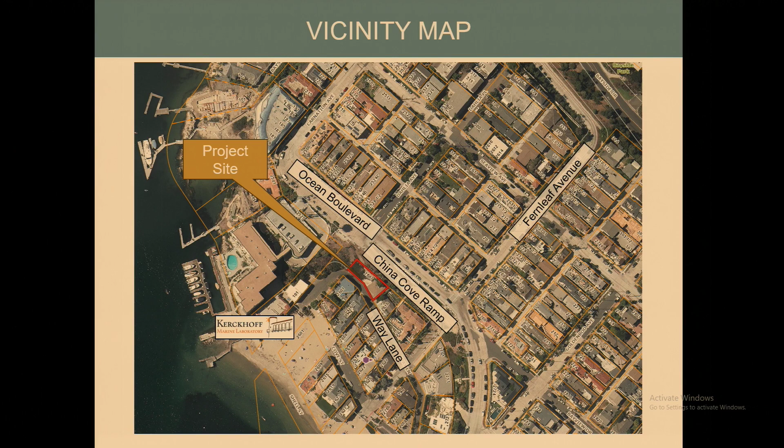The project site, 2607 Ocean Boulevard, is located within Corona del Mar. Surrounding land uses are almost exclusively residential, with the exception of the Marine Lab right there on the water. I've highlighted some of the streets in the nearby area that I'll be referring to throughout my presentation: Ocean Boulevard, the China Cove Ramp, Way Lane, and Fernleaf Avenue.

The project location is within an area known as China Cove, which was developed for residential uses approximately 80 years ago. The project site is outlined in yellow, and while the shape looks like a rectangle, the lot is actually irregularly shaped—somewhat like a bow tie. It's located on a remnant bluff with an extreme slope from Ocean Boulevard down to Way Lane, sloping approximately 35 feet.

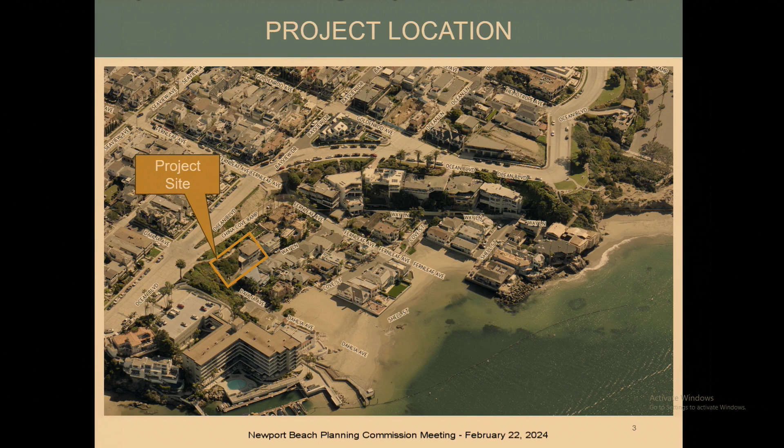Also adjacent to the property is what looks like a green strip of landscaping—that's an area known as the Ocean Boulevard Public Right-of-Way. There are 8 other properties that share this extreme slope between Ocean Boulevard and Way Lane. I'd also like to highlight that there is an undeveloped city property immediately west of the project site, and an undeveloped area on the Marine Lab property.

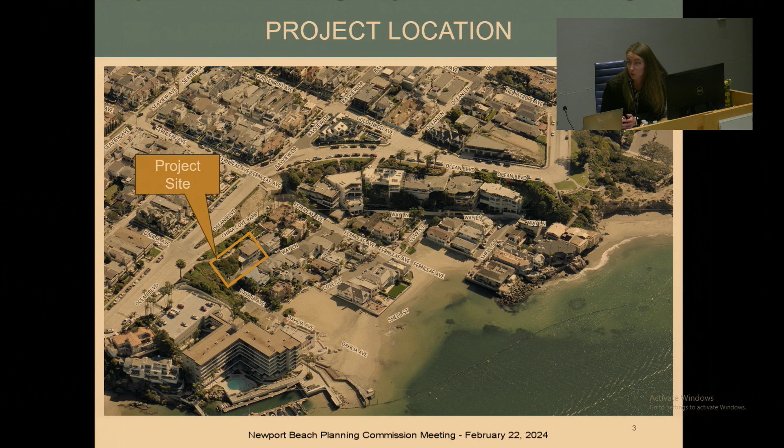The existing site was developed in the late 1940s. There is a 3-story single-family residence. The existing development is non-conforming as it exceeds the height limit along the southern edge, and it also encroaches into the required front, rear, and easterly side setbacks. While there is a garage visible in this photo, the garage is undersized and the residence provides no code-compliant parking. Above the retaining wall, that is the undeveloped area of the property, landscaped with natural vegetation.

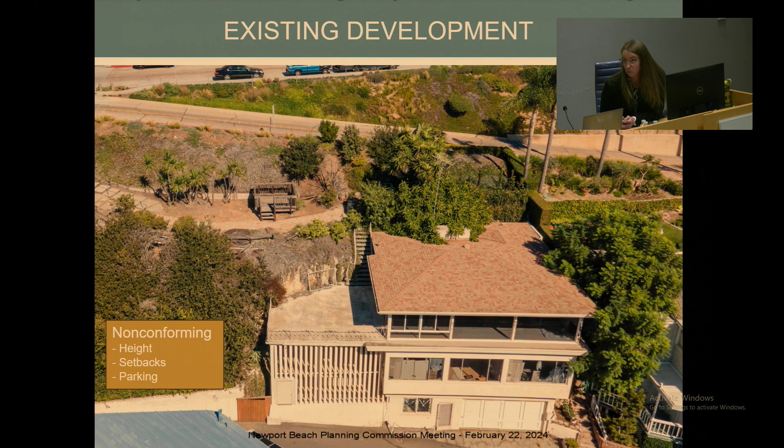Within the public right-of-way I mentioned earlier, there are unpermitted encroachments beyond the property line, including a staircase providing access from Ocean Boulevard to the existing residence, as well as an observation deck along with large landscaping. Within the public right-of-way at Way Lane, the building actually encroaches beyond the property line, highlighted there in red. Also, while not an encroachment, I'd like to point out that the building has recently been vandalized and has been boarded up, sitting like this for a little while now—I'll speak to that on my next slide.

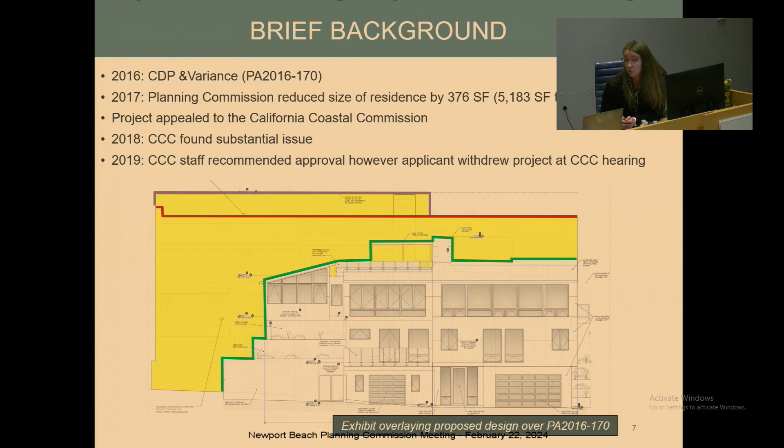About 8 years ago, there was a proposal to redevelop this site. The previous owner applied for a CDP and variance. The design proposed 8 years ago is shown in yellow, with the roof line shown in red. It was a 4-story building with a privacy screen above the roof line shown in purple. The Planning Commission approved this project in 2017, and it was subsequently appealed to the California Coastal Commission. Coastal Commission staff recommended approval, however the application was withdrawn at hearing due to concerns about potential impacts to views.

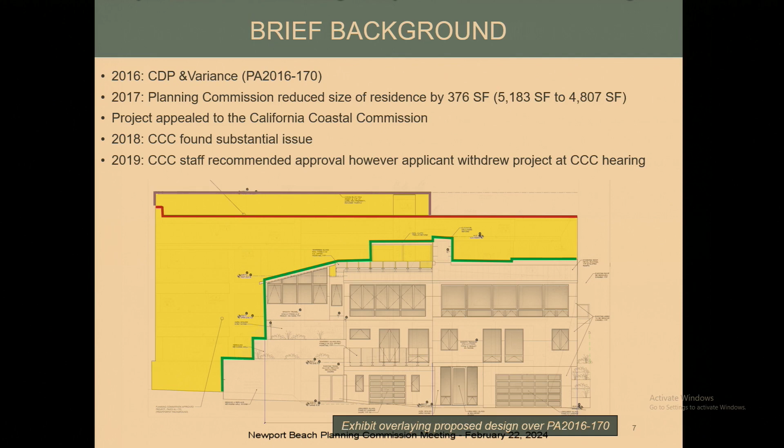I'd like to highlight the current proposal, outlined in green—it's significantly smaller than the proposal from 8 years ago by approximately 1,000 square feet. So that takes me into the current proposed project. It will add 1,490 square feet for a residence just shy of 4,000 square feet, with area added to the lower level, the middle level, and the upper level.

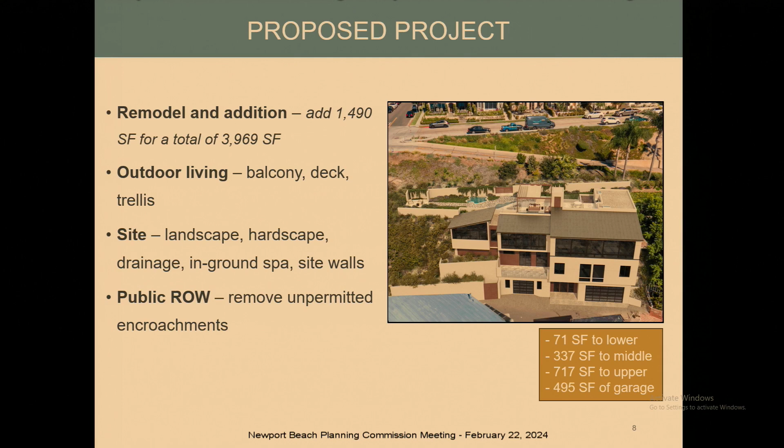The project will create code-compliant parking as well as provide an additional space. There are improvements proposed on the exterior of the structure, including landscape, hardscape, an in-ground spa, and as part of the project, the encroachments within both the Ocean Boulevard right-of-way and the Way Lane right-of-way will be removed. As seen in the picture on the right, a portion of the site will be left undeveloped and in its natural state.

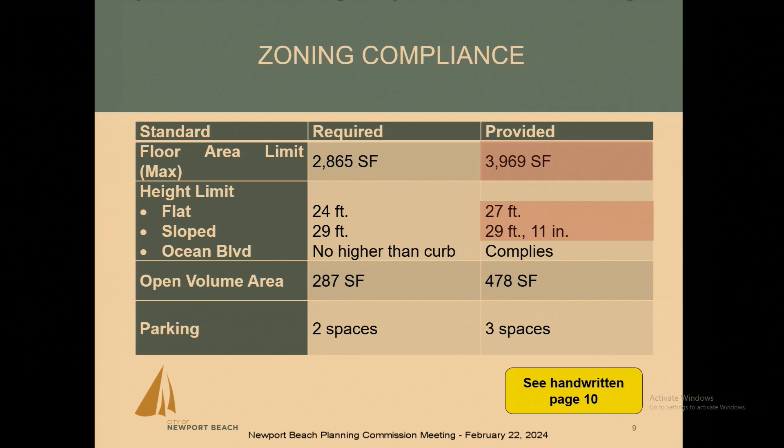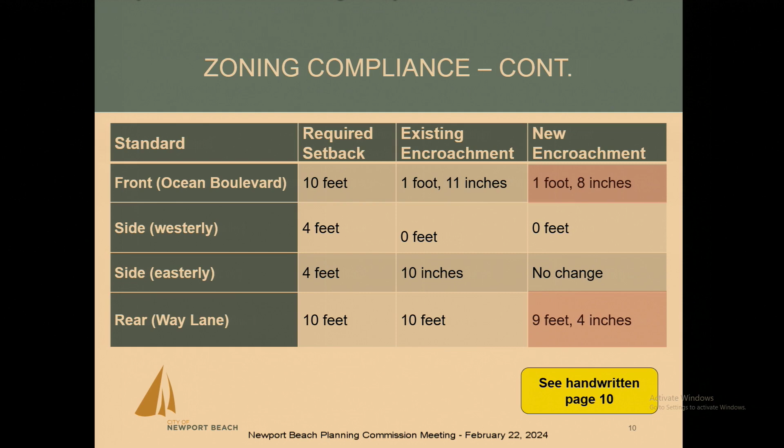Now, with regards to the setbacks, as I mentioned, the building currently encroaches into both the front, rear, and easterly side setback. The proposed project will introduce new building mass within the front and rear setback, in the amount of 1 foot 8 inches for the front setback, and 9 feet 4 inches for the rear Way Lane setback. However, it does not introduce any new building mass into the easterly side setback.

The project requires discretionary approvals in order to implement. It requires a coastal development permit, and for those reasons I mentioned prior, for the floor area, the height, and the setback encroachments, it requires a variance from both Title 20 and Title 21 standards.

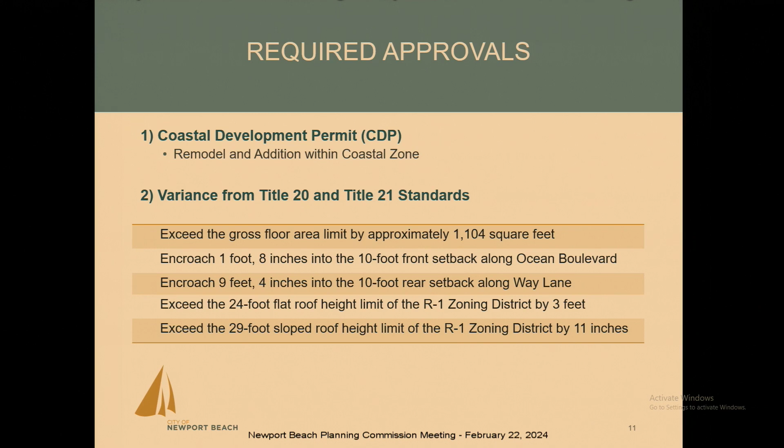In order to recommend approval of the project, staff is required to make a certain set of findings for the variance and for the coastal development permit. In order to recommend approval of a variance, there has to be some special or unique characteristic of the lot that's depriving the property owner of enjoyment of their lot, and it can't be a special privilege or detrimental to the surrounding properties. Similarly, in Title 21, our local coastal implementation program, there are the same findings, but there are additional findings with regards to impacts to coastal access and views.

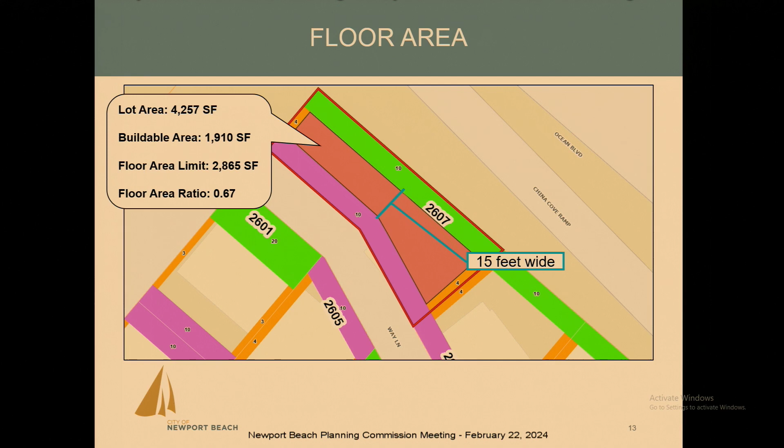This image here dives into the first request for a variance for the floor area. As shown in green and purple, those are the code required front and rear setbacks. It eats up a large portion of the lot. This is a really wide and shallow lot, and it results in a really narrow buildable area. In the most constrained point, the buildable area is only 15 feet wide. So this lot has a floor area ratio of 0.67.

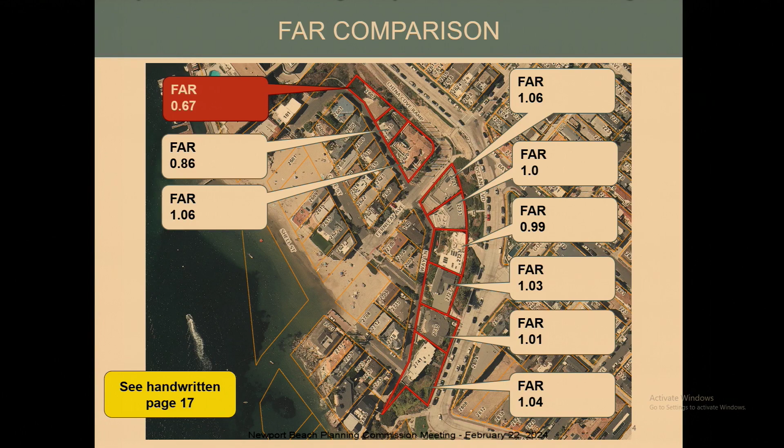Comparing this property to the other 8 properties between Ocean Boulevard and Way Lane that have that really similar extreme slope, all of the other properties have higher floor area ratios. Bringing the analysis to the properties that abut Way Lane, as you can see, these properties encroach into the required setbacks on Way Lane, so these properties likely already exceed the floor area limit as well.

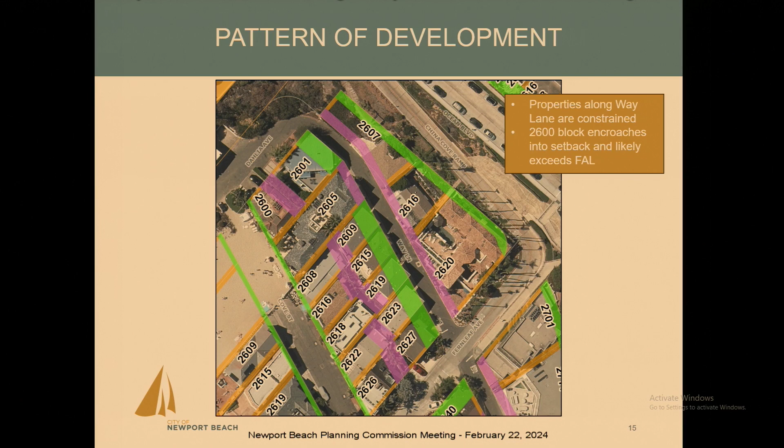A little bit about Way Lane. Way Lane was historically an alley. It's 20 feet wide, and so if it was still designated as an alley, it would have a 0-foot setback. As you can see, the majority of the development along Way Lane goes up right to the property line because it was an alley at one time. So this proposed project follows the existing pattern of development.

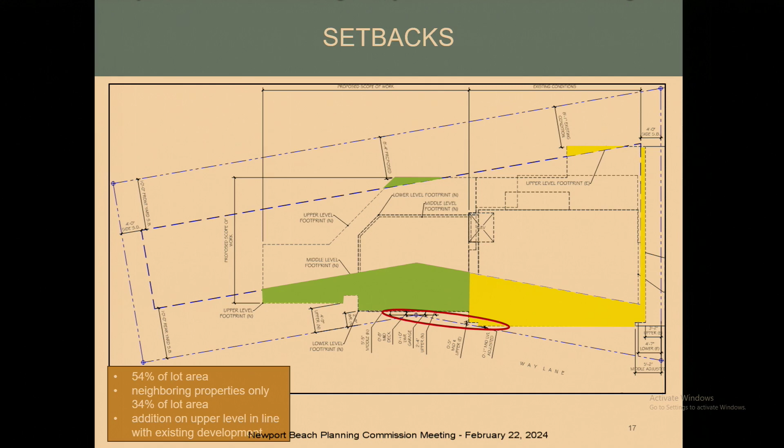As I mentioned earlier, setbacks eat up over half of this lot, where the surrounding properties' setbacks only take up approximately 34% of those lots.

And I also want to note that both of these exceedances still comply with that top of Ocean Boulevard curb limit.

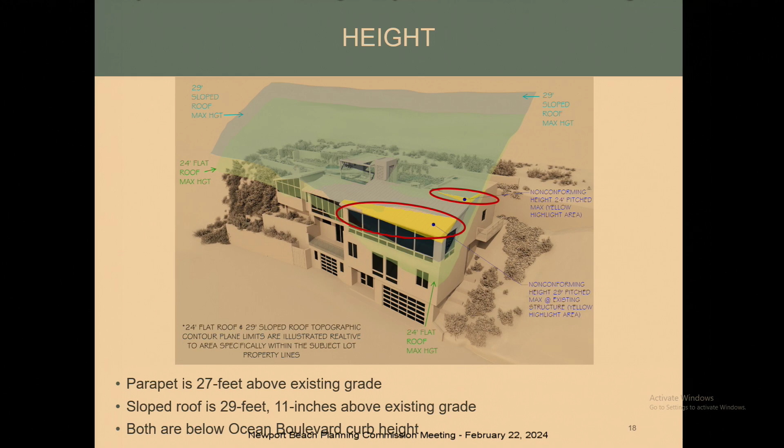Next, a discussion of public views. Our code requires us to protect public views, so I've highlighted the nearest designated public viewing points.

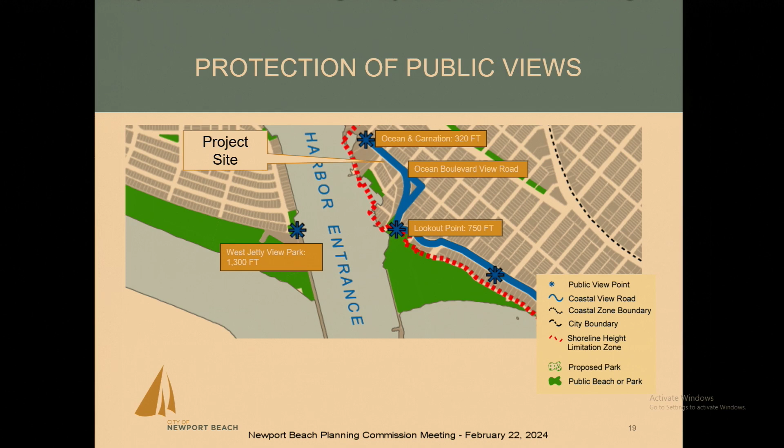The views from Ocean and Carnation and Lookout Point are not analyzed in this project, as the project is blocked by the existing development. However, views from West Jetty View Park are included, and Ocean Boulevard.

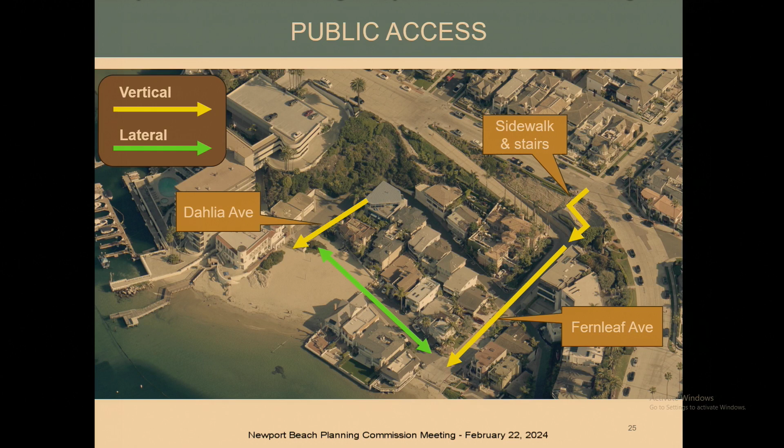This slide shows public access within proximity to the site. The public can access the coast through stairs from Ocean Boulevard down to Fernleaf Avenue. This project does not include any features that would obstruct access along these routes.

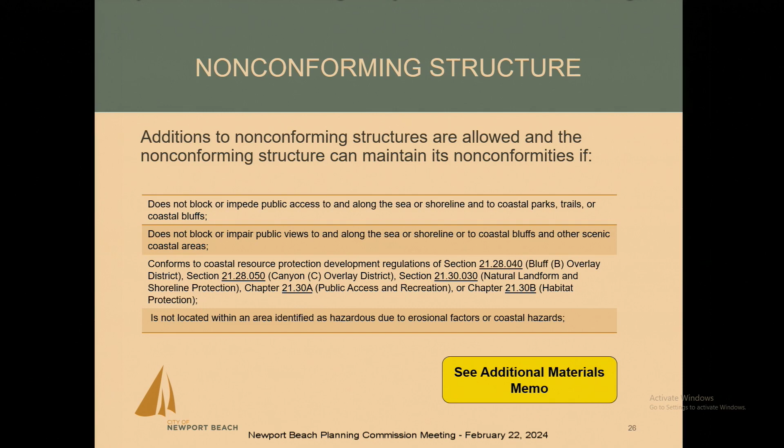Like I mentioned earlier, the existing structure is non-conforming for a variety of reasons. Title 21 has quite a few considerations that need to be made in order for an addition to be allowed. Staff analyzed the project against these considerations and found that the project complies and the addition is allowed.

Staff has received written comments regarding the project, one letter of support and multiple letters of opposition. In response to some of the written comments received, staff has revised the resolution to include additional facts, and that revised resolution was made available as additional materials earlier today.

I'd also like to mention that in the construction management plan, there is a reference to construction occurring on Saturdays. However, this is an area where you can't do construction on Saturdays, so that'll be fixed prior to building permit issuance. So staff has been able to make the findings to recommend approval of the project.

So next steps would be to conduct a public hearing, find the project exempt from CEQA, and adopt the resolution approving the project. That concludes my presentation. I'm available for questions. The architect is also here and has a brief presentation.

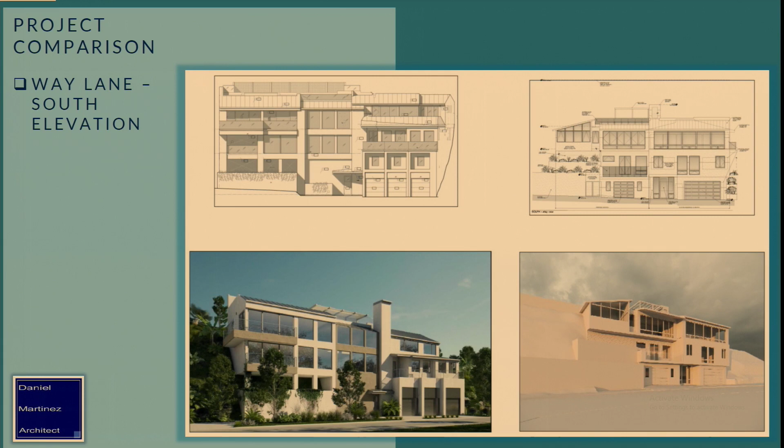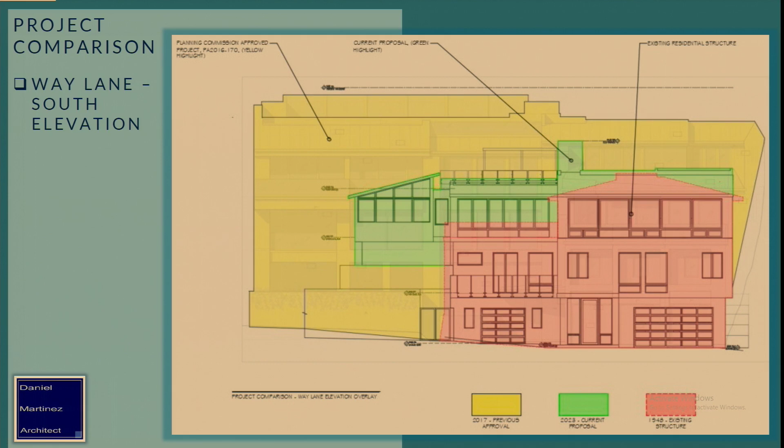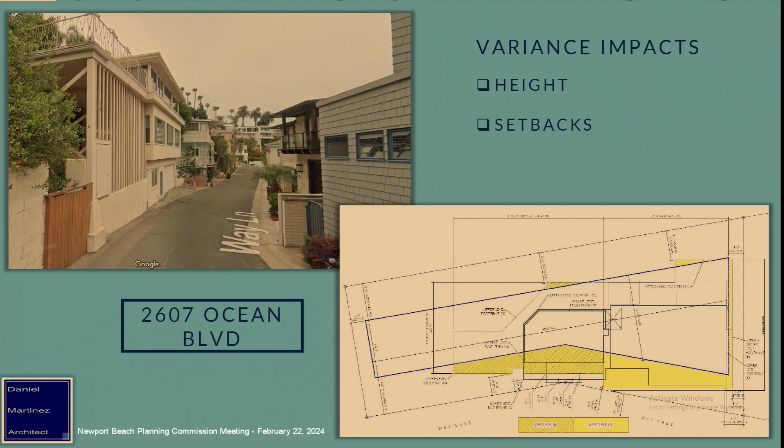So I'm only going to briefly touch on the variances. I think the staff report really drills down on why the justifications exist. Again, we're showing here the same patterning that Jocelyn showed in her slide, and this kind of bow-tie effect that the existing property presents to us. One of the complications in the justification for an FAR variance is primarily because in order for us to fulfill the percentages that an FAR provides, we would have to fit that in essentially the width of a car space, and that just doesn't work for a residential construction of any sort. So the remedy, of course, is the variance application, and I think the justifications have been put forward nicely by staff.

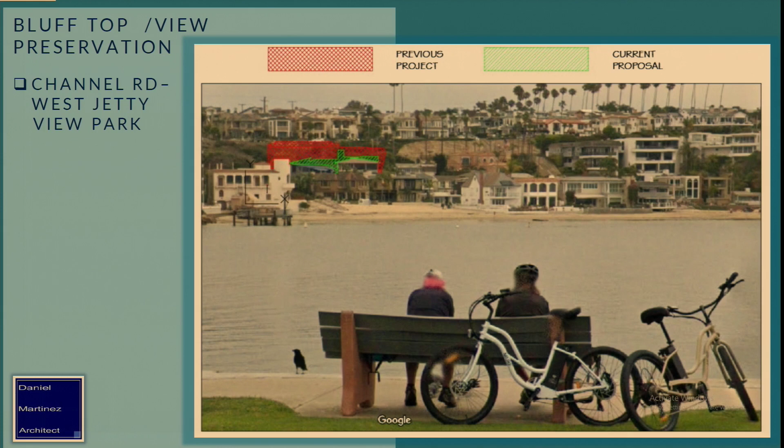And as you can see, it's about 84% larger than the proposal that we are bringing here tonight. And to see that in context, this is an important slide, primarily because the standard for which the Coastal Commission will review bluff view and the preservation of bluff has to do with the built environment that already exists.

So if you look, it's not a super clear slide, but if you look from just about center of the slide, you see the roof line in kind of a Spanish revival style home, which is two doors down. And if you follow that roof line across to the house just to the east, sandwiched between our project and the Spanish revival style house, and then moving across our property, you'll see that there is a common prevalent design pattern there that we are honoring.

And the other important thing here, of course, is now you can see in this slide the amount of bluff top view and preservation that we are providing here, even to the extent that you can still see, not so much in the clarity in this slide, but you can still see the entire length of the curb line of Fern Leaf Ramp as it starts from Ocean Boulevard and goes all the way down until it reaches the Spanish Revival type of home. So you're getting not just the bluff from Ocean Boulevard to the ramp, but you're getting a portion of the ramp to the construction that we're proposing.

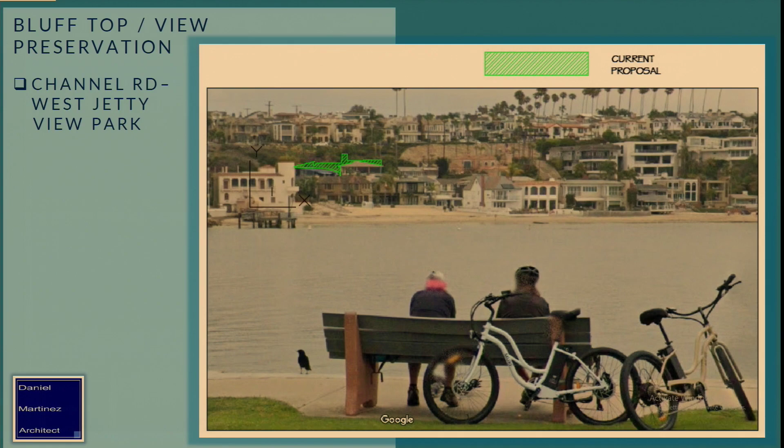And we're trying to mitigate the variance requirement for the encroachment into the rear yard setback, I guess it is, since it's an Ocean Boulevard address. And then we continue to do that all the way up the building.

So when you get to the next level up, we're pulling back another 7 feet. And the next level up, we're pulling back 4 feet from the existing facade. We kind of periscope back into the lot.

Everything from that point, in terms of elevation, our highest point, as Justin's brought out, we cannot exceed the height of the curb at Ocean Boulevard. But the highest point of the building, the elevator shaft that extends in the center, is 10 foot 9 inches below that mark. The remainder of the property is between 16 and 17 feet below that, which is why, as you saw in that other slide, we can afford the views down to China Cove Beach.

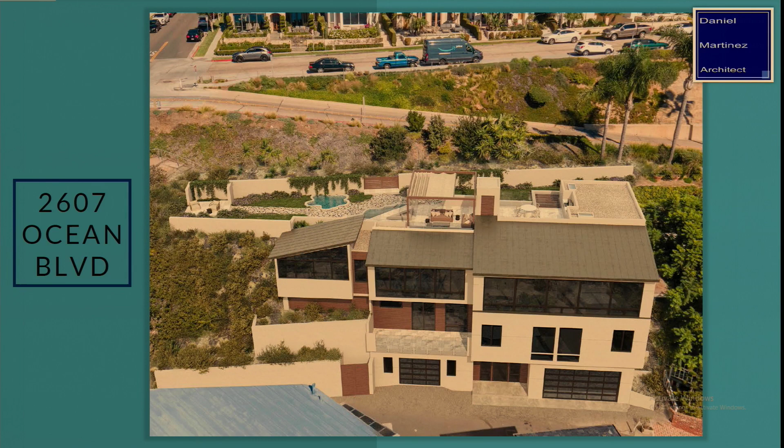That seemed like a prudent way to approach it, given the comments of the Coastal Commission on the last project. And the last thing, all the new construction outside of the footprint of the building, as we go into this addition from right to left, all of the heights for those roofs are completely conforming to the requirements of the zone. With that, thank you for your consideration, and I'm available for any questions you might have.

Just real quick, we'll probably have a couple of comments for you, but first off, have you read and do you approve or agree with the conditions of approval? The conditions of approval in regard to the staff report and their conditions that are assigned?

So if I'm understanding specifically, we have the conditions of approval that were in regard to the public right-of-way off of the ramp. Myself and my client have talked about this at length. One of the things we've worked on with Public Works and Parks Department is the removal of the dirt walkway, and a rehabilitation of that slope at our cost, where indigenous and drought-tolerant plants will be placed there. They would be irrigated for a period of time where they would take hold, and then the irrigation systems would be removed.

Okay, great, so that's a yes. An absolute yes, sorry. Perfect, that was a long way of saying yes. Thank you. Any commissioners have any questions for the applicant?

Just real quick, just for clarification, you're not taking any access off of Ocean Boulevard or that little area? None whatsoever, from Way Lane. In fact, when we began our preliminary design, it was about the time the city was doing the renovation adding the sidewalk at Ocean Boulevard and the benches. At that period of time, if you've been to the property you know what I'm talking about, at that portion of the benches they incorporated a cable rail system, a guardrail, where the access that previously existed was completely blocked off unless you're climbing over the rails.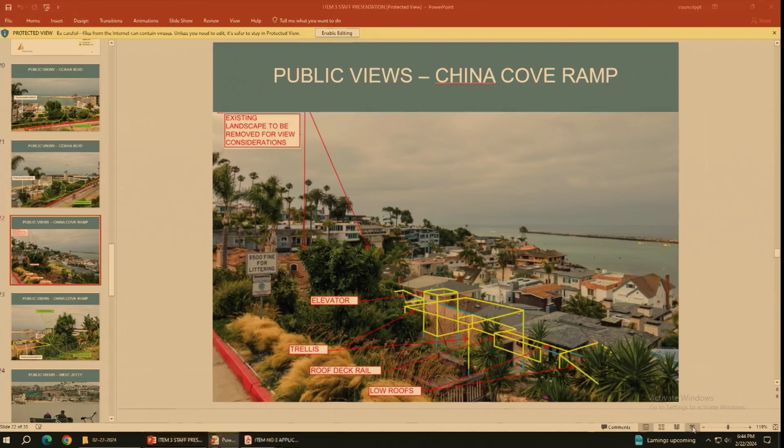Might as well stay there for a second. Commissioner Langford? Yes, Mr. Martinez. If you wouldn't mind pulling back up that view from the ramp, if you still have that. I'm going back to the palm trees because I'm curious how it's going to lay out in this new view, especially from the ramp side, because I saw there were a couple of other palm trees in the frame of existing landscaping. So are these proposed palm trees of that same kind of look, and can we expect it to grow to about that same size?

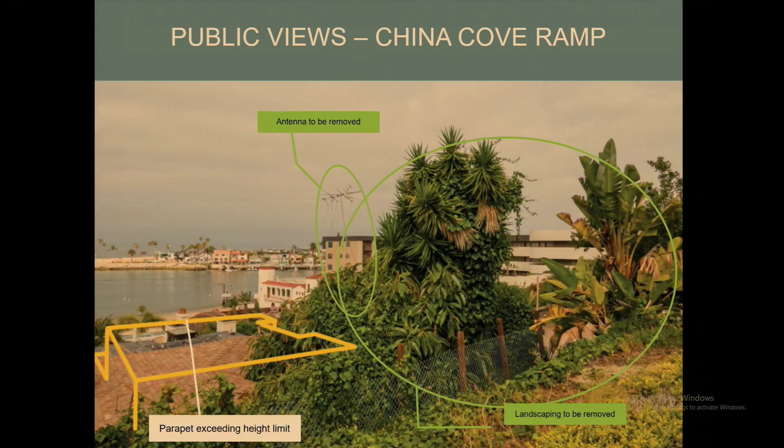This isn't quite the view. I think it's one more back, or a couple. Yeah, that's probably a good one. So those two palm trees do not exist on our property. Within the circles that staff has provided here, that is the foliage that exists on our property that we are planning on removing and replacing with the limited height application of the new landscape.

And I guess the reason I'm asking, in the renderings it doesn't show the palm trees, so it's hard to visualize what the end product is going to look like. Are those palm trees what you're going for, the palm trees that are going to be planted on the property? I'm going to be completely honest with you, I do not know.

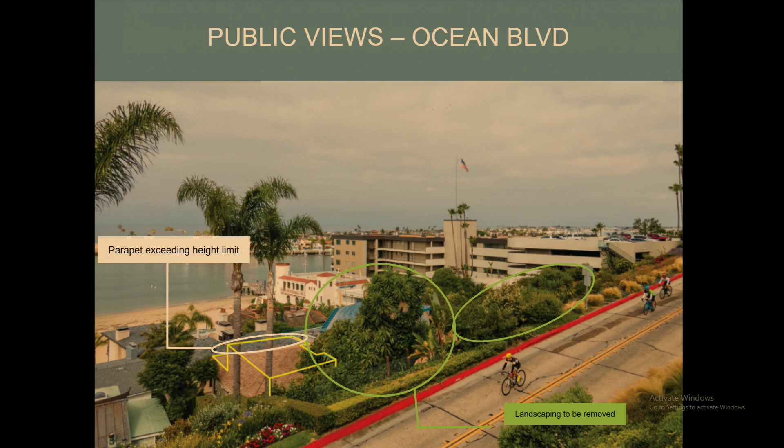Okay, because you're the architect, not the landscape architect. Mission Landscape provided the landscape design for us, and they worked hand in hand not only with Public Works but with our civil engineering consultant who had to do a number of other reports for the application. I will tell you there isn't anything outside of what Public Works specifically required that is etched in stone. So if it were a condition of approval that we rethink those palm trees or remove them, we can work with that.

Thank you. All right, started looking at palm trees. Anyone from the audience wish to speak on this item?

Just on the palm trees, looking at handwritten page 57, it looks like there are 2 palm trees, but I'm guessing they might be in the city right of way. Is that right? On page 57, the rendering, I think those are the existing palm trees. Are those the 2 you're talking about? I was trying to figure out if those ones that aren't on the property, the ones being proposed for the property that aren't shown in the rendering, would be similar or matching to those, kind of part of the cohesive look they're going for. And that height would be limiting to the view, but we have other palm trees that are also kind of limiting to the view, so it might make sense.